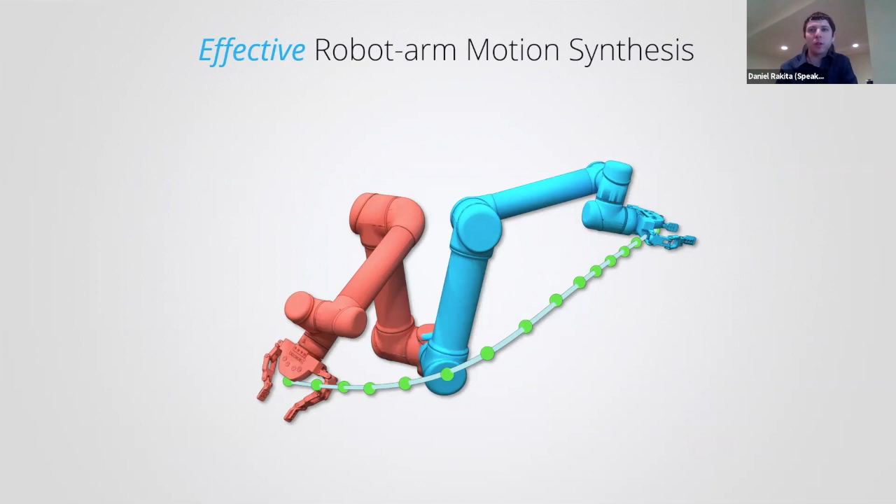The majority of my PhD work has been dedicated to coming up with algorithms that allow robot manipulators to effectively move in the world around us. And I think this begs the question of what does effective motion really mean in a robotics context? It could mean a lot of different things in a lot of different domains and applications. But throughout this talk, I'll argue that there are three important factors when considering robot motion generation.

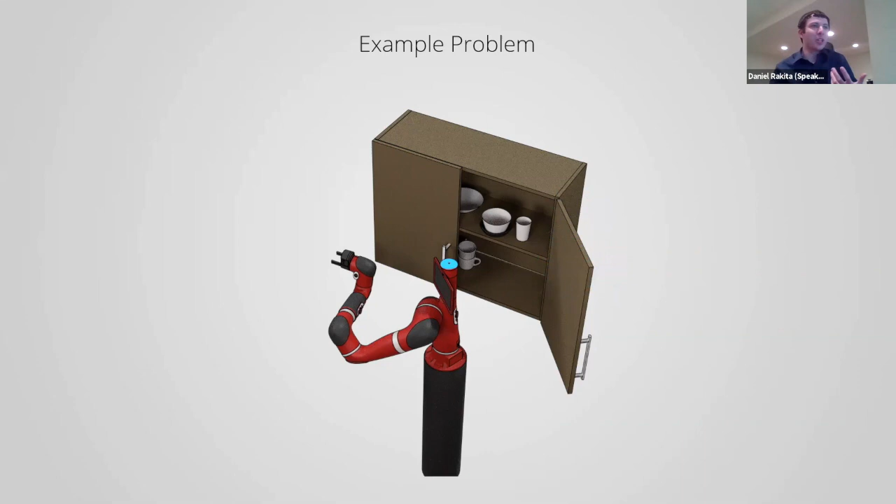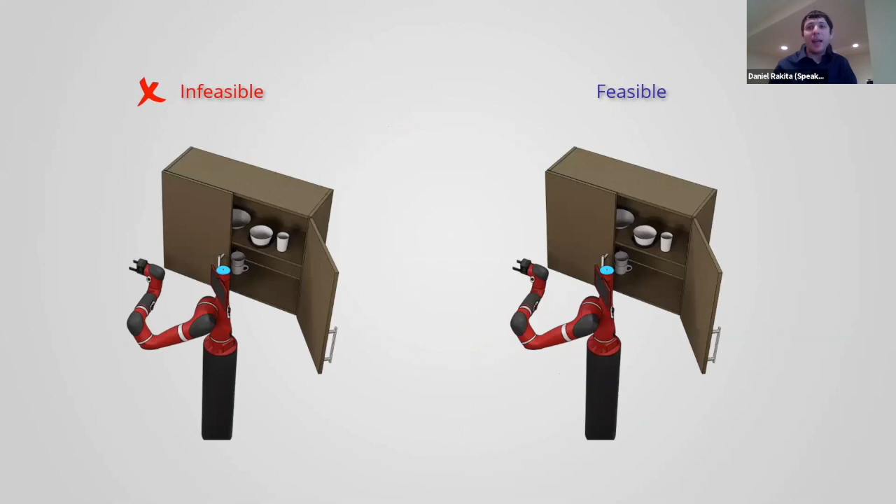To give a sense of these three factors in action, I'll use the following example. Say the Sawyer robot here has to get the cup from the top shelf to the bottom shelf. I think we all have a sense that any definition of effective motion should include the notion of feasibility, meaning the robot motion should be smooth, continuous, and avoid colliding with the environment. Just to give a side-by-side comparison here, it's clear that the feasible motion on the right is more effective than the infeasible motion on the left.

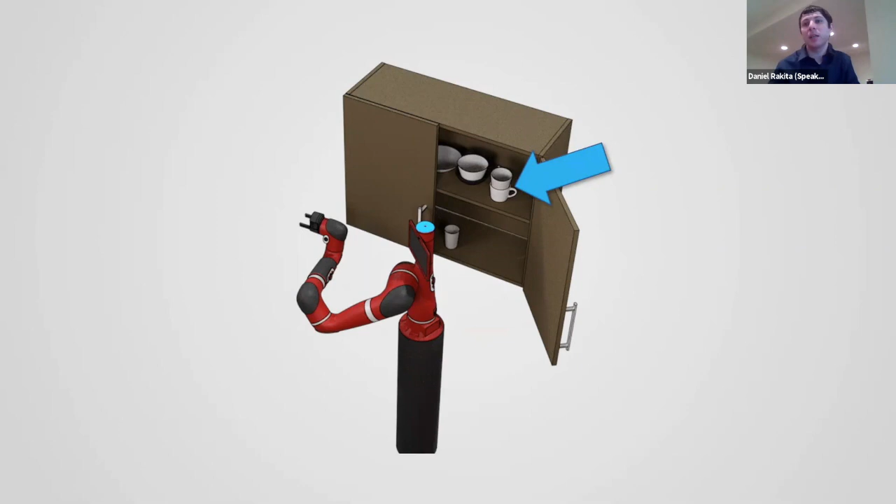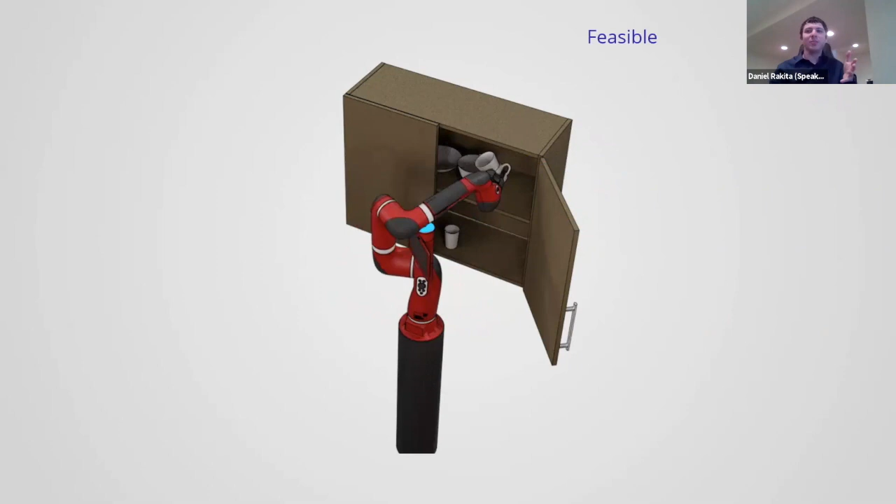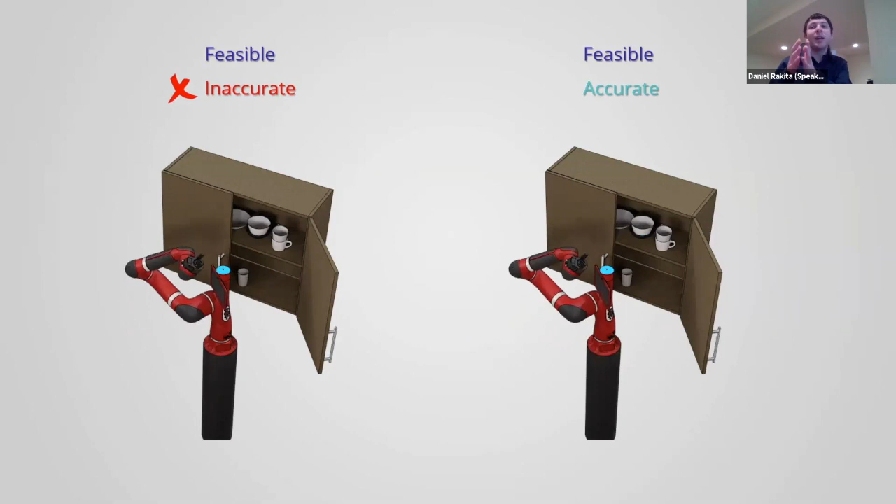But what if instead of moving a single cup, the robot now has to move this stack of 2 cups from the top shelf to the bottom shelf? If we use the same feasible motion as before, this is no longer effective motion in this case, since the top cup will fall to the floor. So in this example, while the motion is feasible, it's still not effective, since in some sense the motion lacks accuracy. So to create an effective motion in this case, we need something to generate motion like the one on the right here, that is both feasible and accurate, in the sense that the robot maintains an upright end effector throughout the motion.

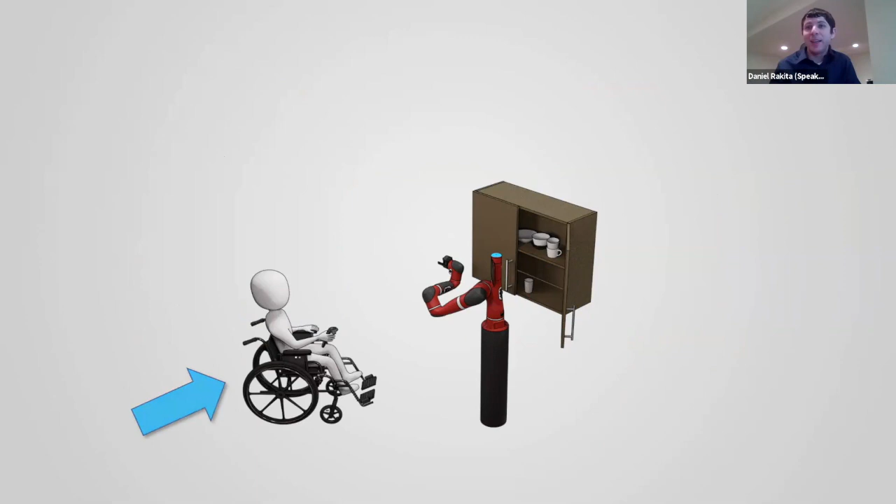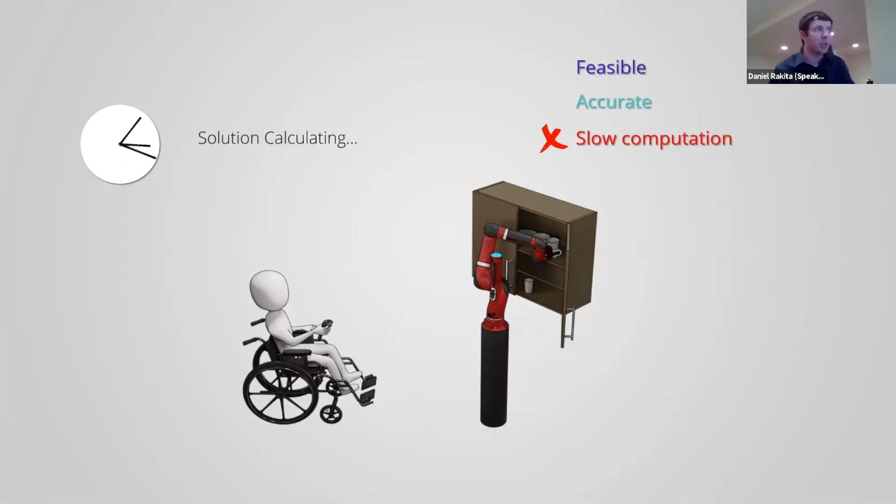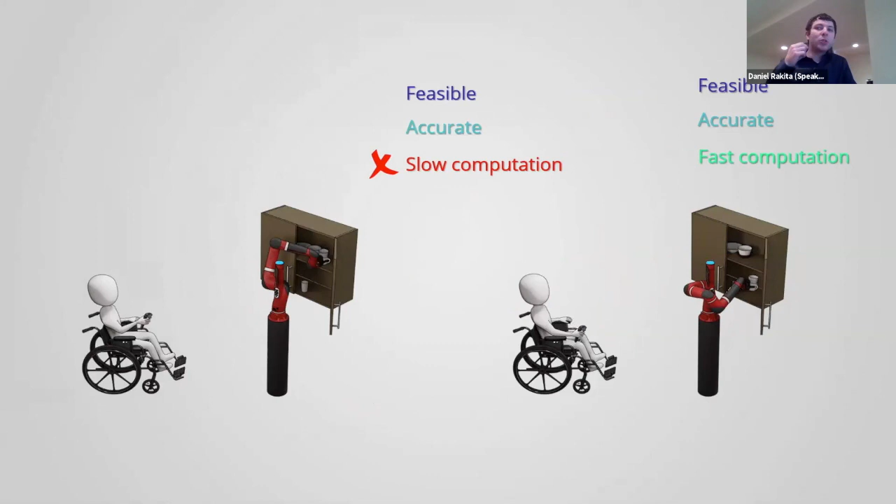Taking this example one step further, let's say we now want to allow the individual on the left to control the robot platform using our motion control algorithms to move the stack of cups, maybe using some sort of shared control interface. In this case, just having feasible and accurate motion won't be effective if it means that it takes many seconds or even minutes to compute these motions. Thus, the motion on the right here is more effective because it is feasible, accurate, and was also computed fast enough to keep up with real-time interactive demands of the task. To be clear, by fast versus slow computation, I'm not really referring to implementation quality, although that does play some role in some cases. I'm referring more to the fact that some problems themselves in robot motion generation may be inherently complex, say NP-hard or exponential in nature. So we have to get a bit creative to come up with solutions quickly.

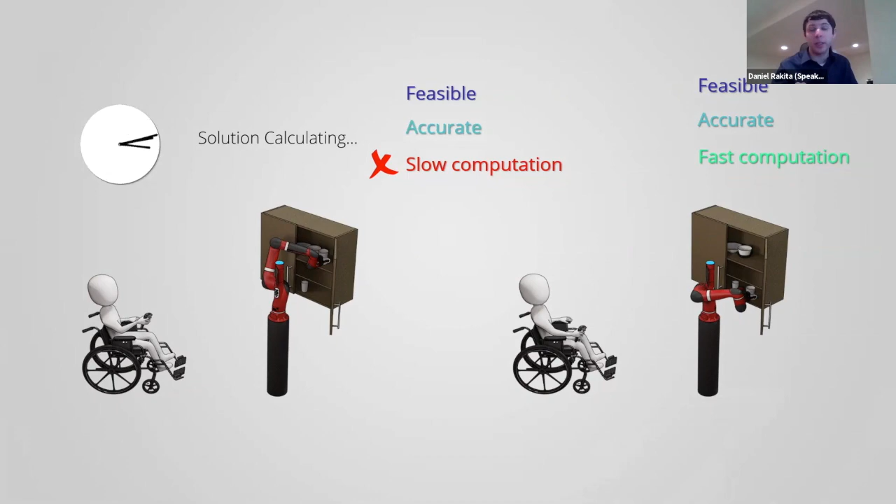So to quickly recap, the three factors of effective motion I've brought up so far are feasibility, accuracy, and computation speed. I think of these three things as vertices for my particular research space, and different algorithms have different trade-offs in this space. I'll keep coming back to this illustration throughout the talk to point out where I think current algorithms lie in this space.

The goal that everybody is aiming for is a general algorithm that would hit all of this triangle. I don't think it's too controversial to say that no one has really achieved an algorithm that does all three of these things. But a lot of my work has been spent chasing this overall goal, and I'll point out throughout the talk where I think we are in terms of achieving it.

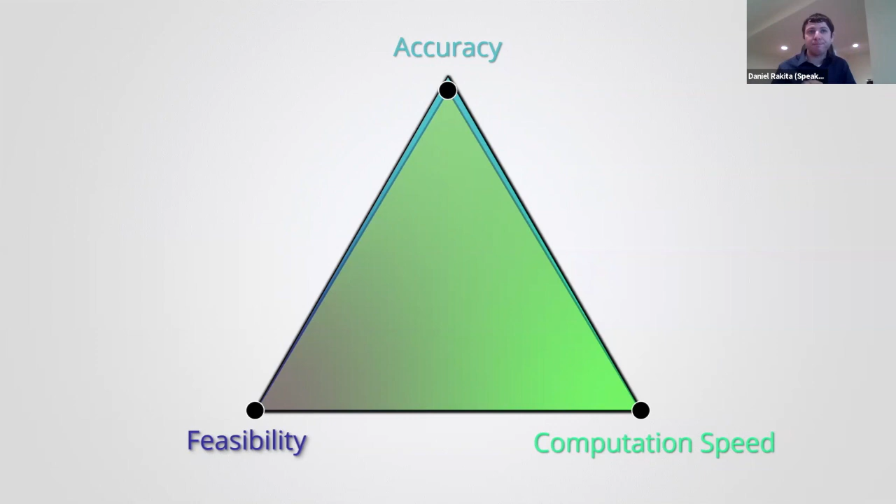So jumping into the technical methods. The primary motion framework that I'll be discussing for achieving accurate and feasible robot arm motion in real time is called RelaxedIK, which we presented at RSS in 2018.

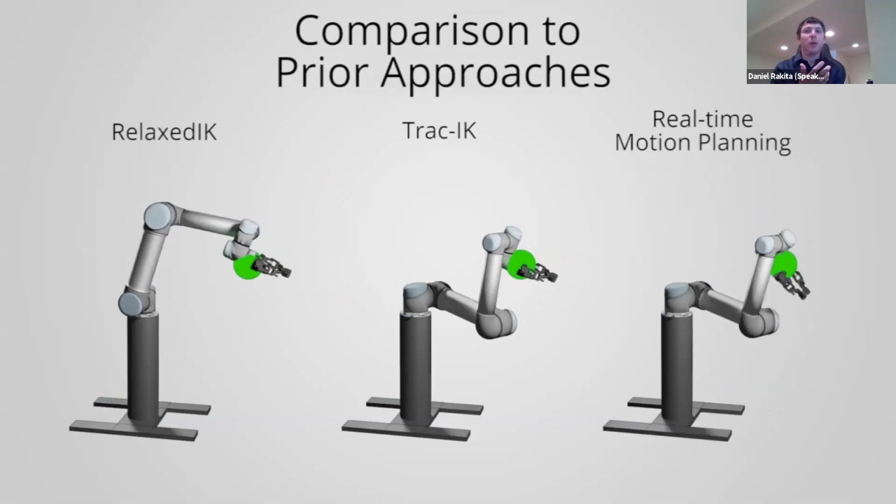Our method matches a series of end-effector pose goals in Cartesian space as best as possible without sacrificing motion feasibility.

In contrast, a direct IK solver like Trac-IK seen here exhibits infeasible motion qualities such as self-collisions, kinematic singularities, and joint space discontinuities.

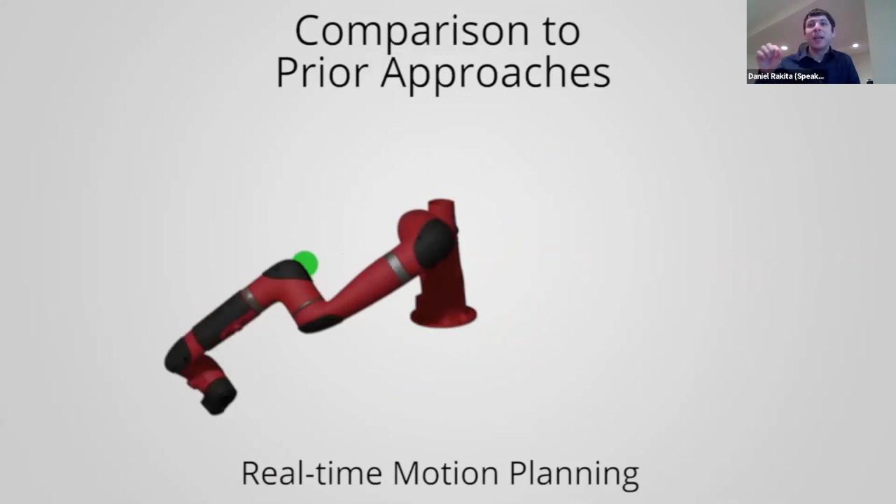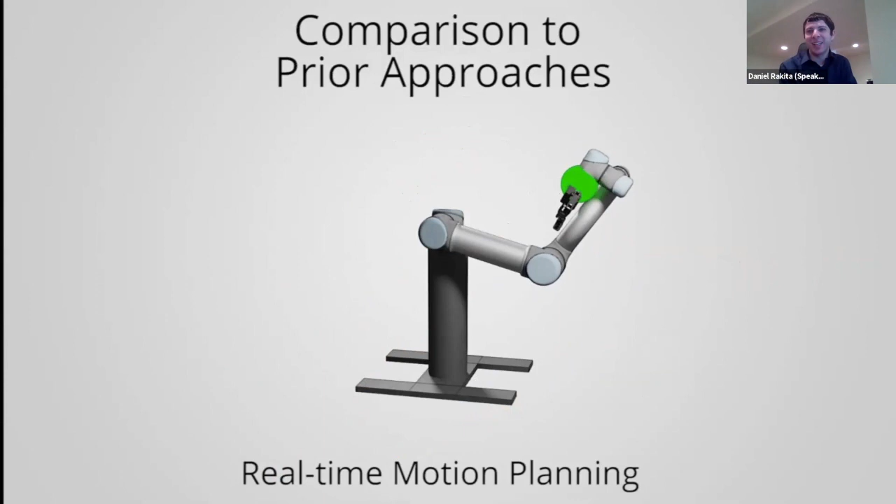On the other hand, something like real-time motion planning approaches do provide motion feasibility guarantees. However, they often require long sweeping motions that sacrifice end-effector pose accuracy in order to achieve these guarantees. For example, this motion shows the robot moving along this long arcing motion just to go a short distance in end-effector space to avoid a self-collision.

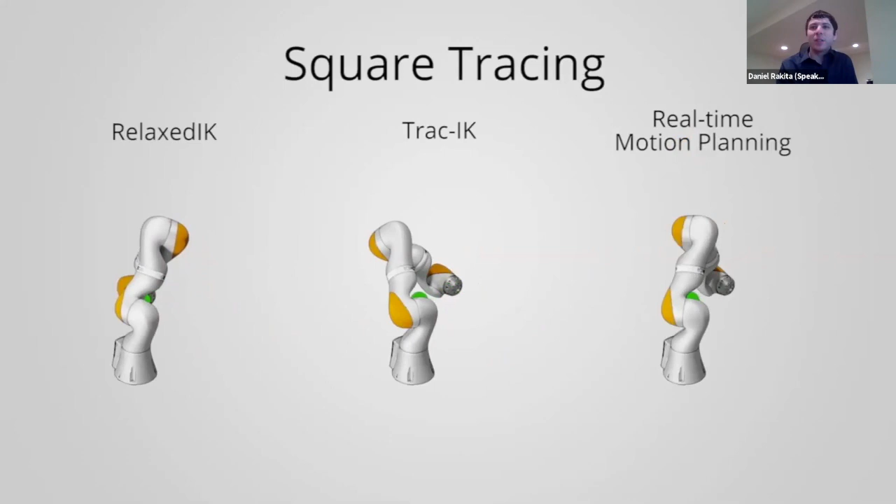So our method not only exhibits feasible motions that avoid self-collisions, kinematic singularities, and joint space discontinuities, but it also exhibits accurate motion that consistently matches end-effector pose goals over time.

Coming back to our triangle view of this research space, while Trac-IK has motion accuracy and computation speed, it lacks motion feasibility. Real-time motion planning has feasibility guarantees, but lacks motion accuracy and is relatively slow to compute solutions on the fly. RelaxedIK tries to gain a better mix of these three factors by relaxing a bit of motion accuracy to gain a lot in motion feasibility.

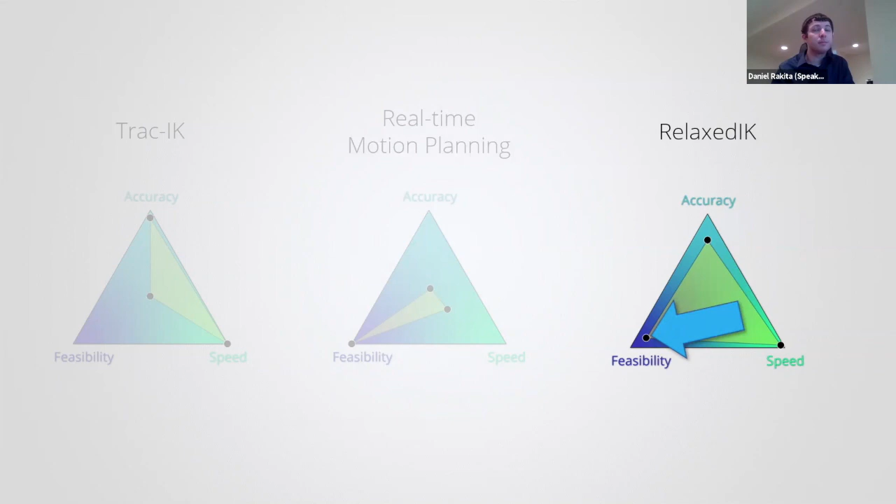So how do we achieve this under the hood? We achieve many objectives on the fly by casting the standard IK formulation as a weighted sum nonlinear optimization problem, where motion objectives such as end-effector pose matching, smooth motion, self-collision avoidance, and so on are encoded as individual terms in the sum.

We present a normalization procedure such that our method is able to effectively make trade-offs between many potentially competing objectives. The weighted sum objective function and a set of constraints are provided to a nonlinear optimization solver at each update, where a new robot configuration is calculated.

For details on all the objectives and constraints that we include in the solver, please see the paper. But in this particular talk, I'm just going to highlight how we formulate the self-collision avoidance term.

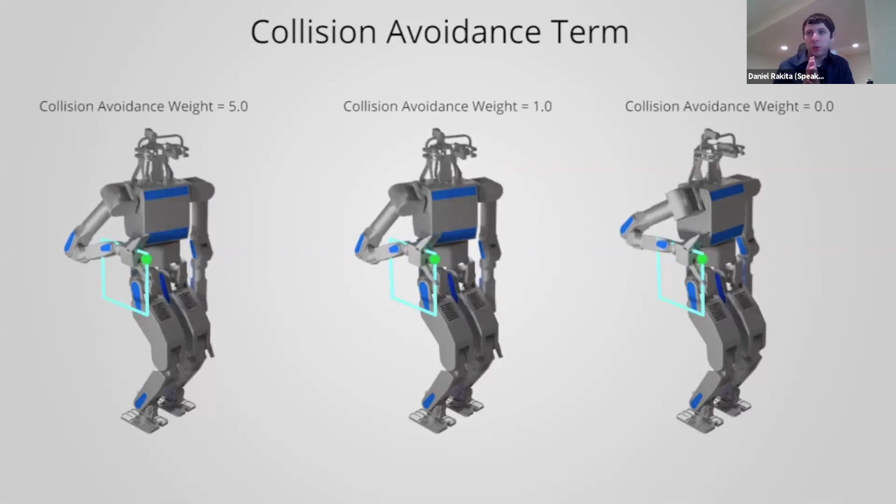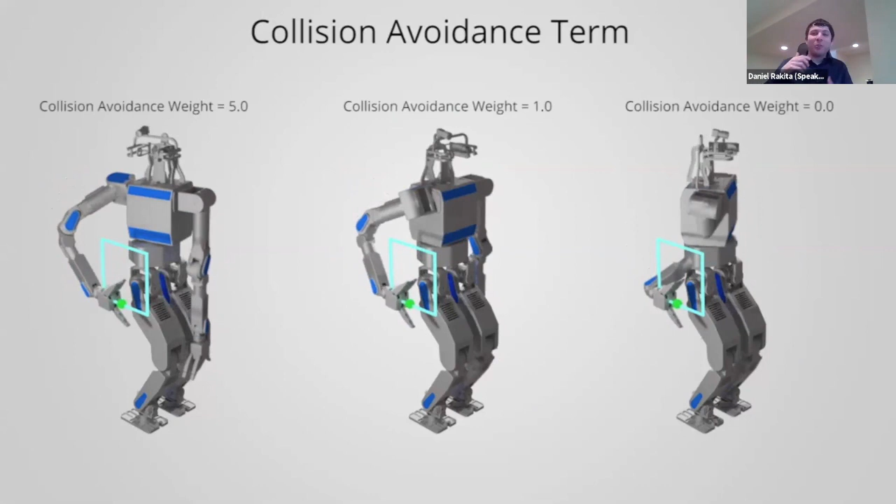Our collision avoidance term is trying to achieve two high-level goals. First, estimate a distance to a collision state in order to maximize this distance at each optimization. Second, we want to calculate this distance as fast as possible such that this procedure is amenable for a real-time optimization control loop.

To achieve these goals, we first approximate the robot's geometry with shape primitives and line segments and perform distance checking between all pairs of links. This procedure does work and it is robust, but it is too slow for real-time use.

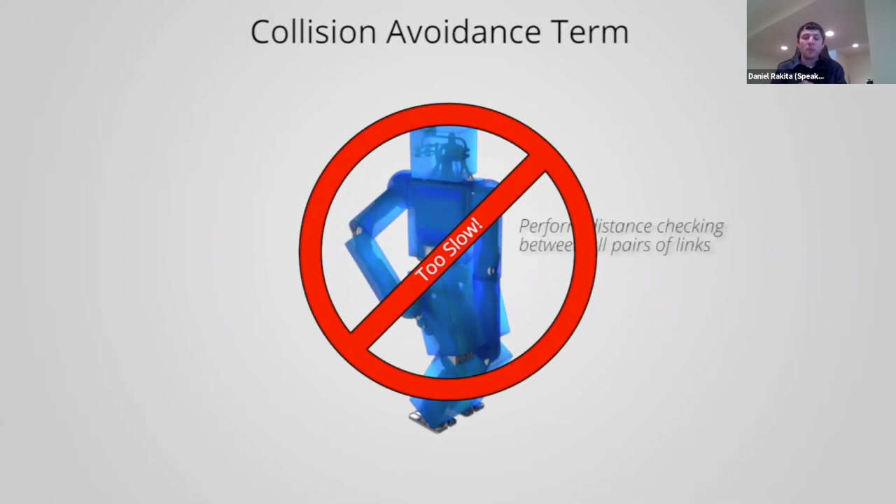Our central idea here is that we can sample hundreds of thousands of instances of this original collision potential function and train a neural network to approximate that function instead. The output of this neural network function reliably resembles the output of the original function, but it's two orders of magnitude faster, just doing a feed-forward pass through the neural network, making it plenty fast enough to serve as a single term in our optimization framework.

So we evaluated RelaxedIK against alternative motion synthesis approaches on 7 robot platforms, ranging from 5 degrees of freedom to 8 degrees of freedom, on 5 separate tasks.

We tried a couple of instances of RelaxedIK in our evaluation, one designed to be more accurate and the other designed to exhibit more motion feasibility. We found that both of these versions of RelaxedIK outperform TrackIK and real-time motion planning in terms of accuracy, motion feasibility, and motion smoothness across all robots and tasks.

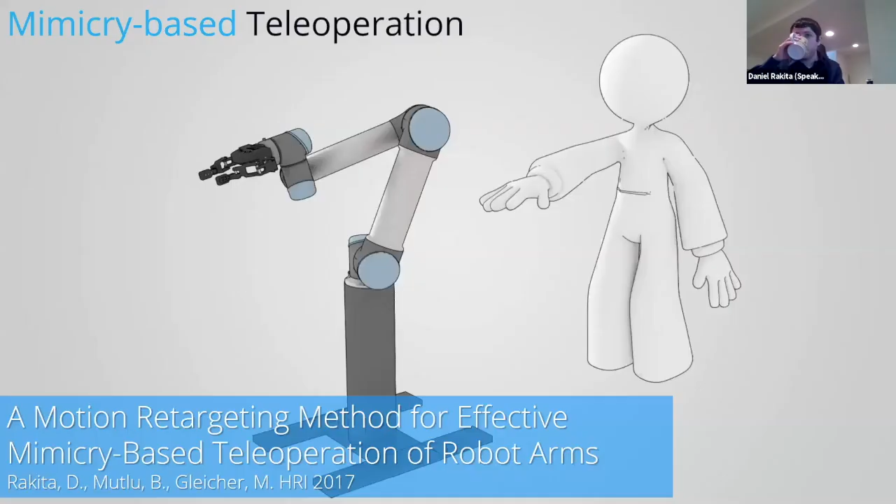So the first method I'll talk about is called mimicry control. This is work that we presented at HRI in 2017. And this is pretty much exactly what it sounds like. This is a teleoperation interface where the user demonstrates a motion in free space with their own arm and hand, and the robot attempts to mimic the motion as best as possible so that it can accomplish tasks in the same way.

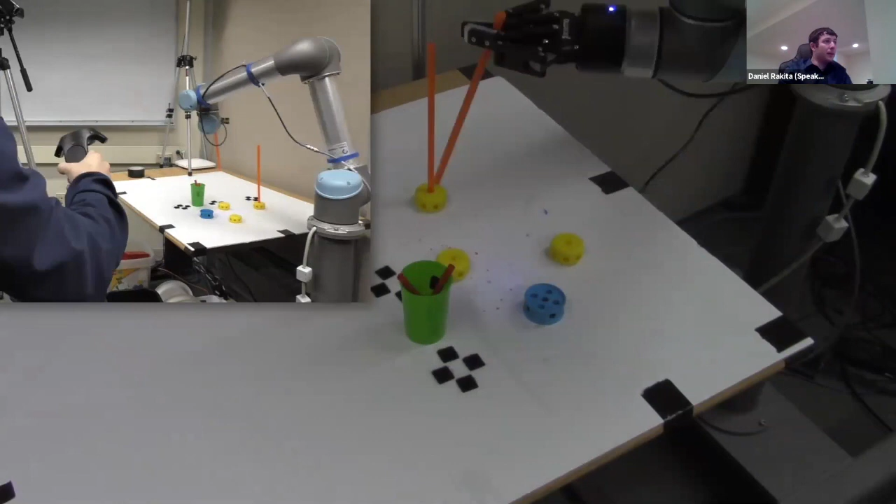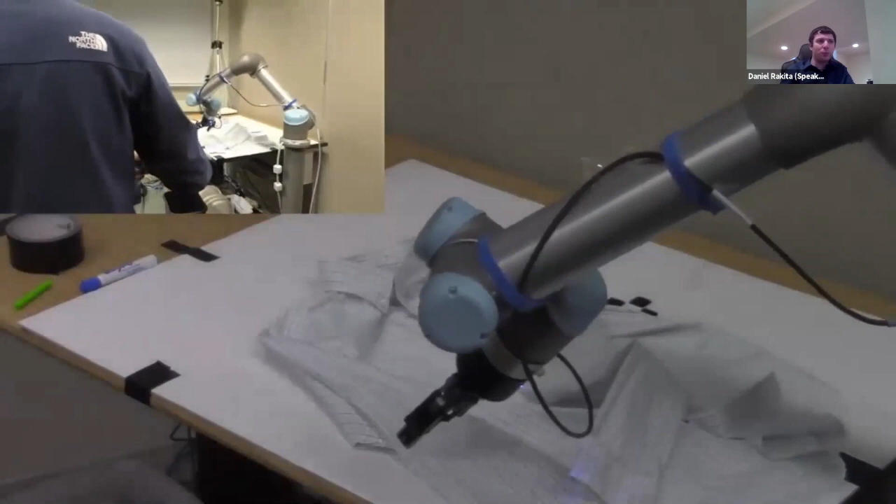And this is what the end result looks like here on a real robot. So the user just has a motion controller in their hand, and they're demonstrating how the robot should execute this Tinker Toys task with their own hand. And here's another example where the user is folding a shirt. So again, a pretty dexterous task that would be pretty difficult to do with another interface without directly demonstrating to the robot how to do it.

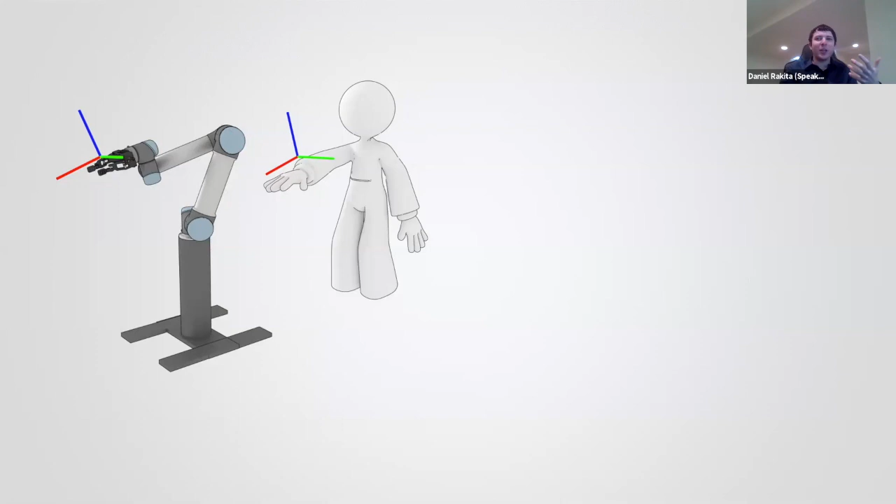So one thing that is probably pretty evident just by looking at this problem is that a robot arm and a human arm can be very different. They can have different geometry. The robot may move much slower or faster than a human arm. The robot may be larger or smaller than a human arm. And even the number of degrees of freedom could be different. For example, the UR5 here has 6 degrees of freedom where a human arm has 7.

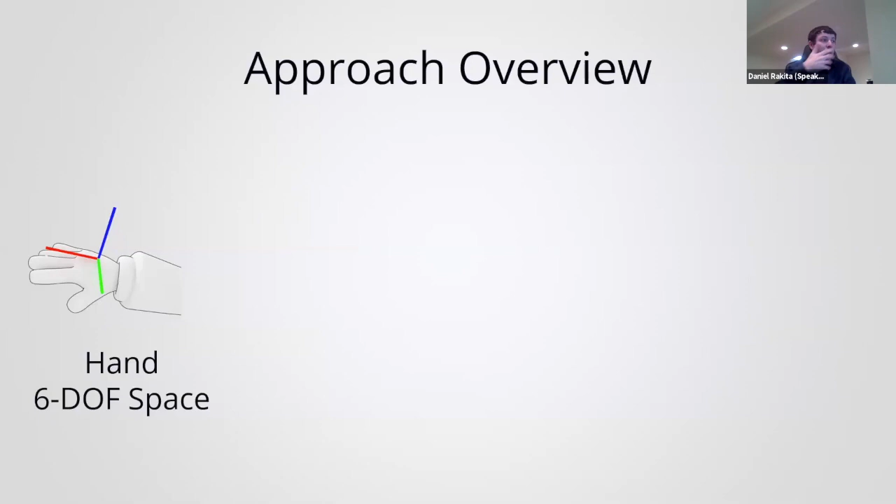So to overcome these differences, here's an overview of one way to solve this problem. We can capture a position and orientation of the user's hand, say with a motion controller. This gets mapped and scaled to the robot's end-effector space. And using inverse kinematics, we can solve for the robot's joint values corresponding to the end-effector pose goal. And this whole process can repeat at each update in the control loop.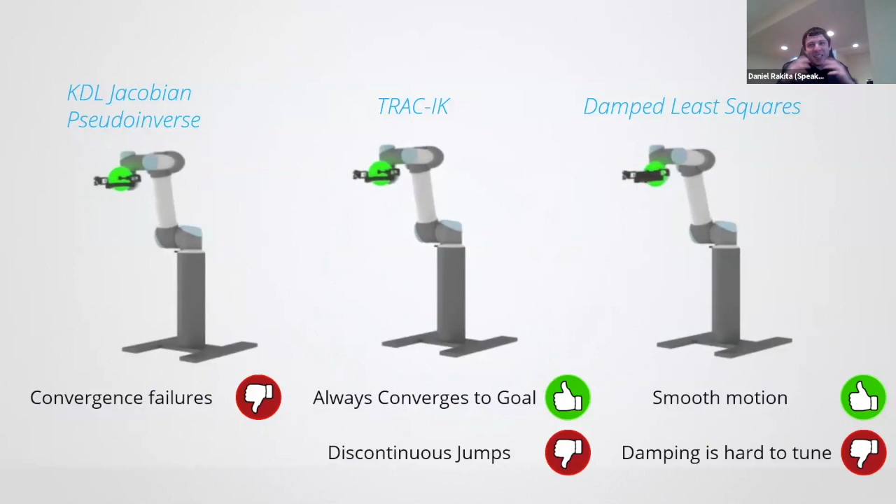So way back in 2016 and into 2017, we tried this method in some preliminary work and pilot studies, and we used some standard inverse kinematic solvers, and here's what we got. So many standard IK solvers across the board were not really up for this task, either due to convergence failures, discontinuous jumps, motion inaccuracy, kinematic singularities, and so on.

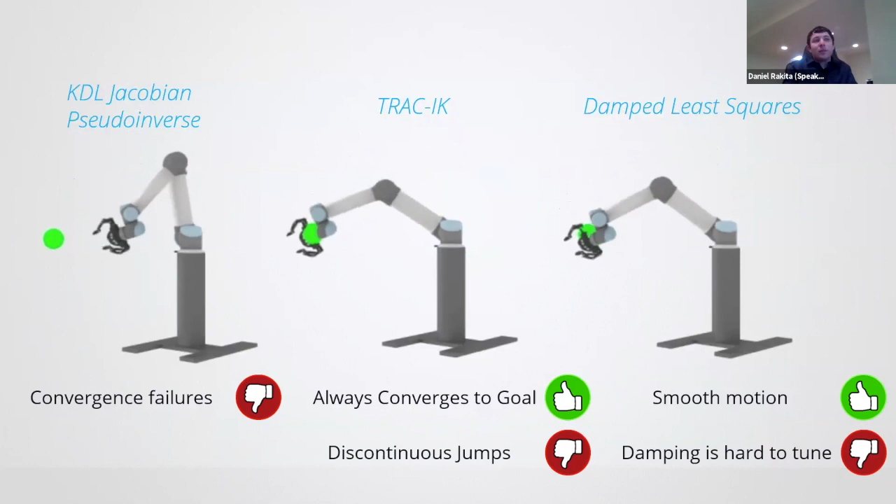So looking back at our overall approach, based on our preliminary results, it was clear that this last step here at the IK stage needed to be more robust. And we developed RelaxedIK in parallel with this work, and it ended up being just perfect for this motion retargeting problem, as the smooth, feasible, and accurate motions provided by the solver afforded a really nice and immersive experience for the operator.

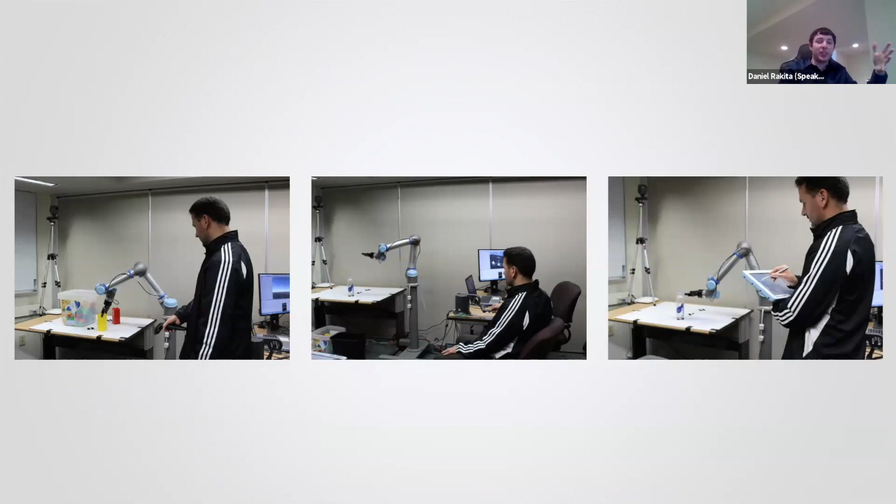And we ran a user study with 24 novice participants between the ages of 18 and 46. And we compared 3 control interfaces: our mimicry control, a 6 degree of freedom stylus device, and the native touchscreen interface of the UR5 robot. All participants tried out all control interfaces, so this was a fully within-subjects user study. And we tested all these interfaces on 3 home care tasks.

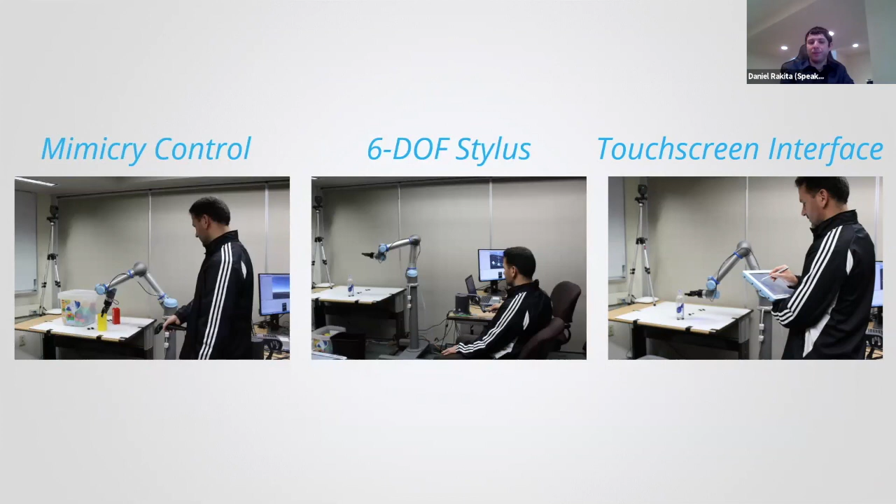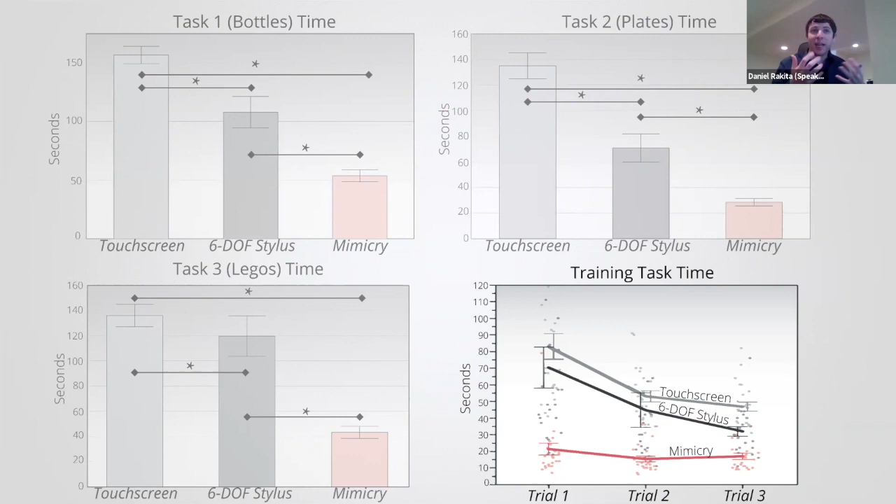And looking at training task time, our participants were able to complete the training task much faster using mimicry control than the other interfaces. In fact, if we look at even the 3rd training task trial using the 6 degree of freedom stylus device, this was still considerably slower than even the 1st trial for mimicry control. So I feel like this was really tapping into some intuitive sense of how to complete tasks and transferring that directly to the robot.

When reflecting on the feedback we got during our mimicry control evaluation, we noticed we consistently got one particular kind of comment. We often heard that the control method was easier to use and more natural than the alternatives, but it was still difficult to clearly see what the robot was doing.

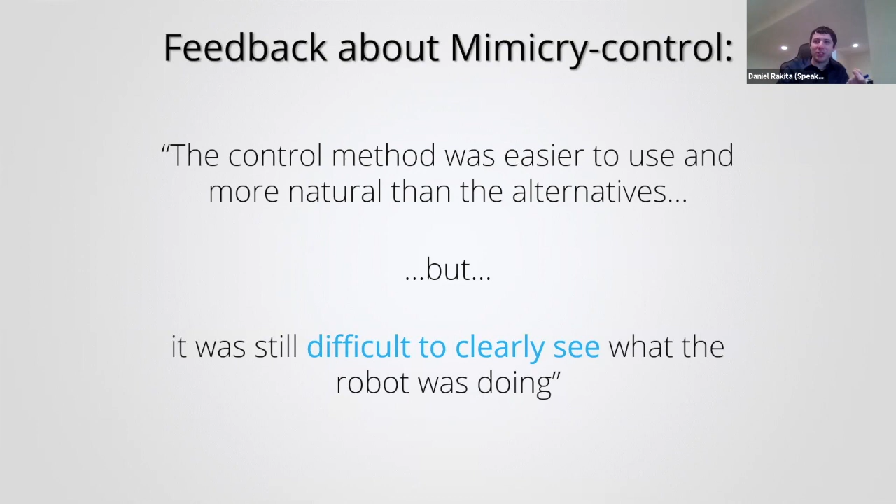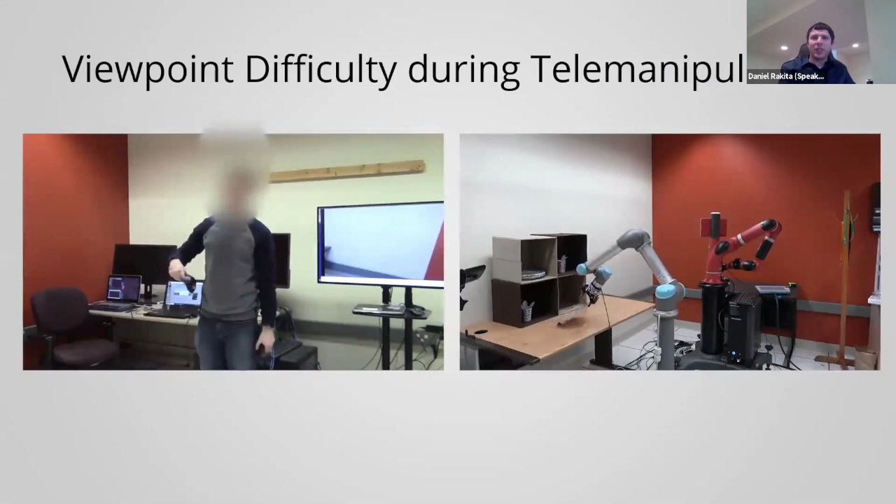When thinking about this problem, we thought, if this is such a big problem when the user is literally standing 6 to 10 feet behind the robot in the same room, this problem will just compound if someone was actually doing remote teleoperation from the other side of the world. So we thought this visibility problem in telemanipulation was something we should really start thinking about.

So to solve this, we looked at a solution where there's an automatic dynamic camera that can move the viewpoint and come up with a sufficient viewpoint on the fly for an operator. This is work that we presented at HRI in 2018.

This is the endpoint we'll be working up to in this work. We have a user remotely controlling a robot arm. On the left, we see what the user is seeing on screen, and on the right, we can see what is actually going on in the remote environment.

We have a second camera-in-hand robot arm alongside the manipulation arm that is automatically and continuously servoing in real time to provide a sufficient viewpoint of the remote environment.

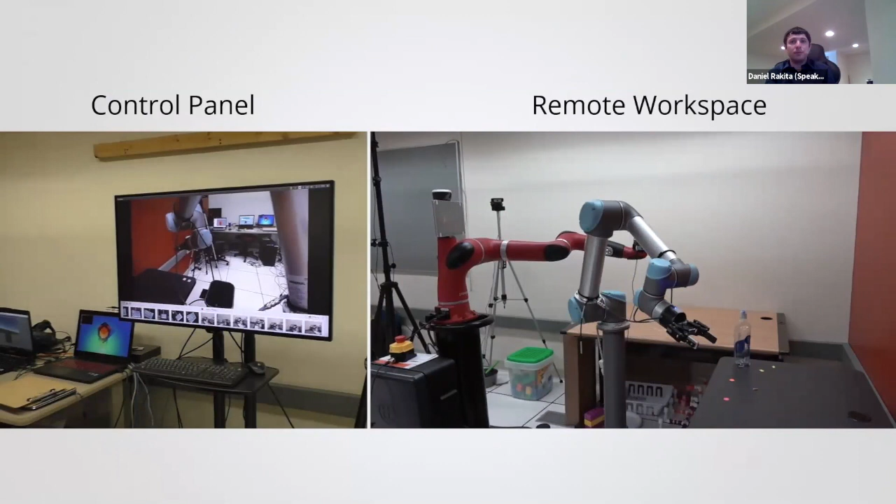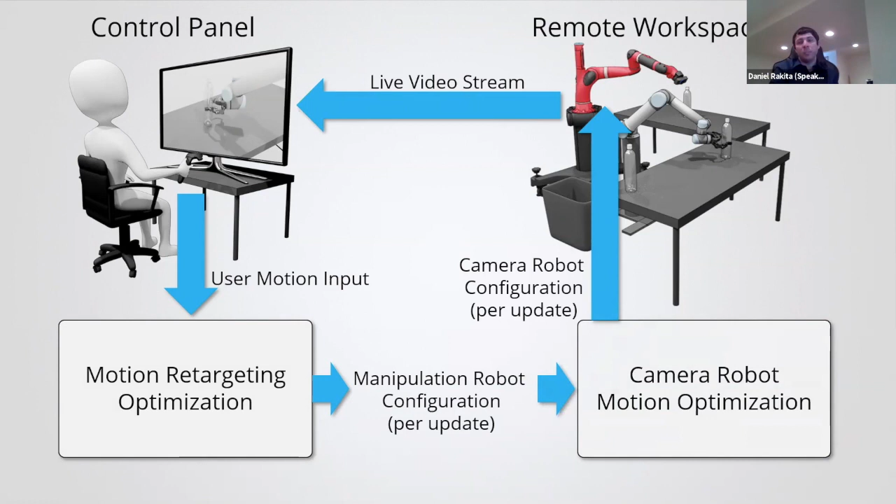So there are really two halves of this problem. The first being the control of the manipulation robot using a motion controller, and the second being the camera robot intelligently moving to provide a viewpoint that it estimates will best support effective manipulation for the user.

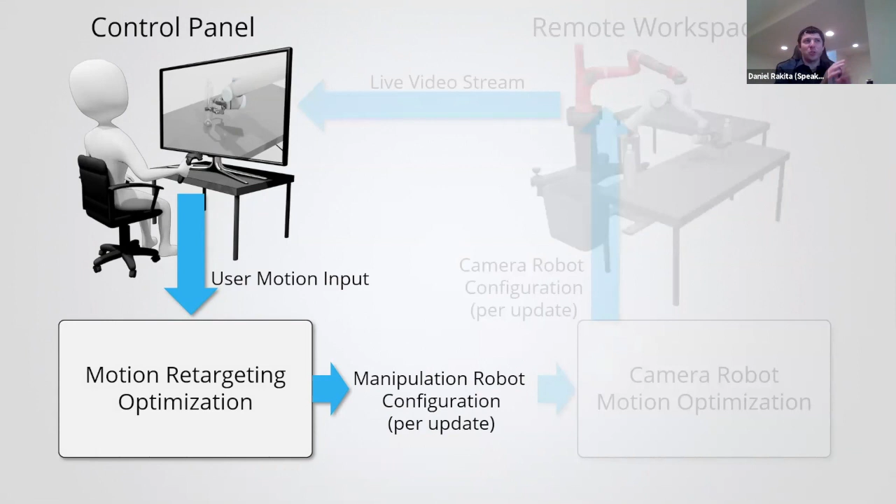So the first half of this problem, consisting of remapping the user's motion to a robot arm in real time, still uses the same mimicry control interface that I mentioned before. So for this part of the talk, I'm just going to highlight the second part of the problem, which is the moving of the camera to provide a sufficient viewpoint.

So the big problem we were looking at is, when faced with this kind of viewpoint that is clearly not sufficient to manipulate something in the environment, what should we do?

Our main premise is that the camera should move on the fly in order to dynamically adapt and optimize the viewpoint to select effective viewpoints for the remote operator.

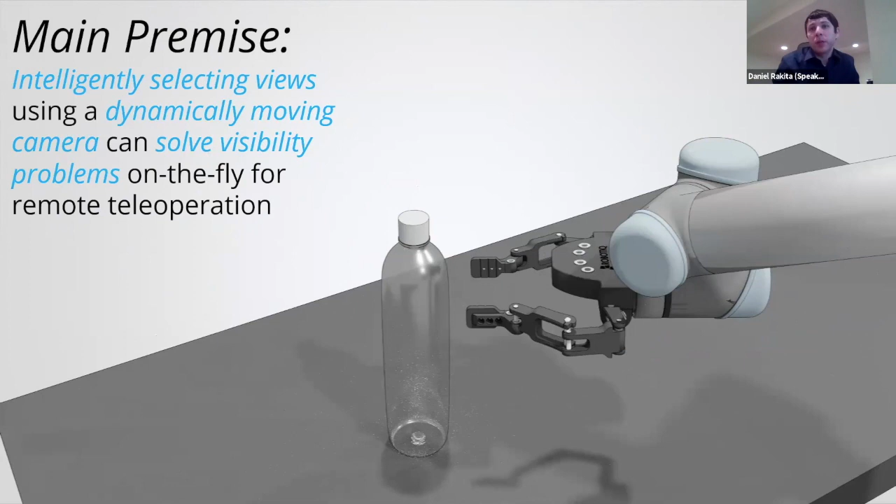Looking back at our solution, the automatic dynamic camera method provides solutions for a lot of the problems that may come up from alternative approaches, such as an end-effector camera or an array of static cameras, such as avoiding occlusions by manipulation or by the manipulation arm, avoiding occlusions by the grasped object, avoiding disorienting views.

We can tailor the control frame to how the user is seeing things on screen, and we can afford context and detailed views based on how close or far the camera is from the manipulation point.

So it's clear that the camera robot is going to have to consider many potentially competing objectives on the fly, such as the ones listed here.

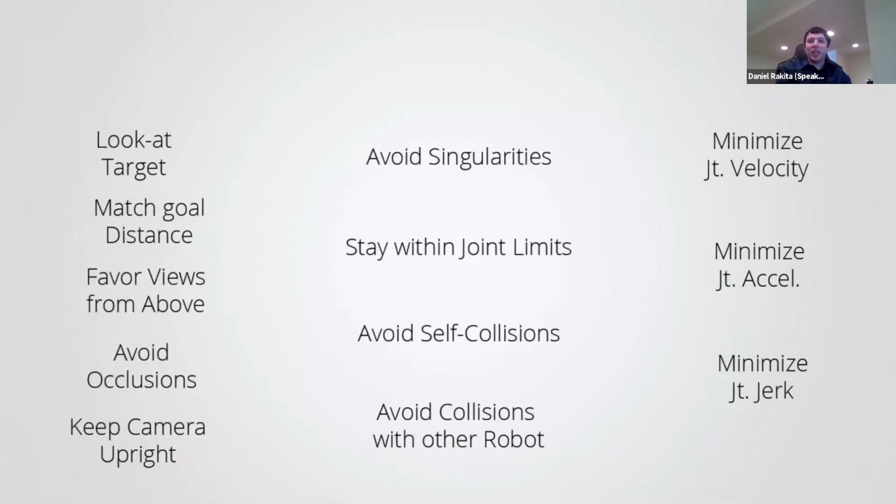To account for all of these objectives in real time, we organize these terms to form components of an optimization. And if we kind of squint as the components come into focus here, you notice we get the exact same RelaxedIK kind of formulation that I discussed before.

The really nice thing about the RelaxedIK framework is it's very flexible and it can accommodate a variety of nonlinear objective terms. So we can even include other things related to just camera motion and cinematography in the optimization, such as always looking at the target point, the look-at target.

Avoiding camera rolls, which will be really disorienting, avoiding occlusions caused by the manipulation robot, as well as favoring views from above for certain situations like a tabletop environment.

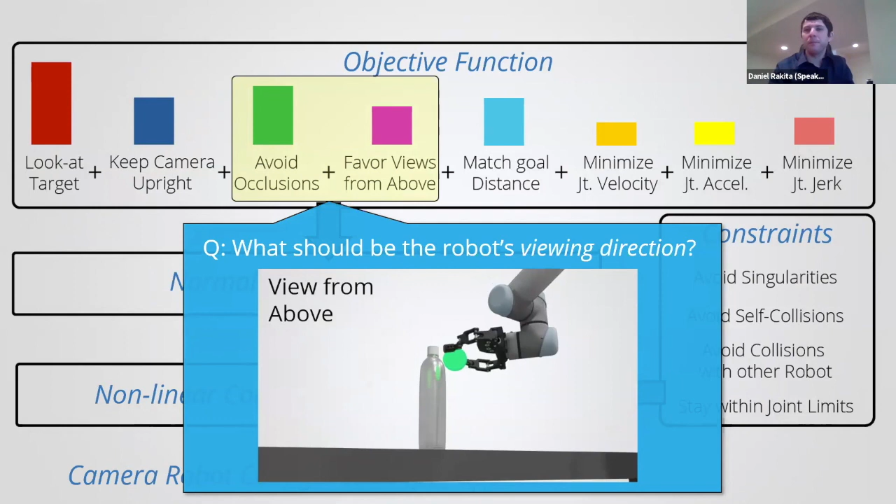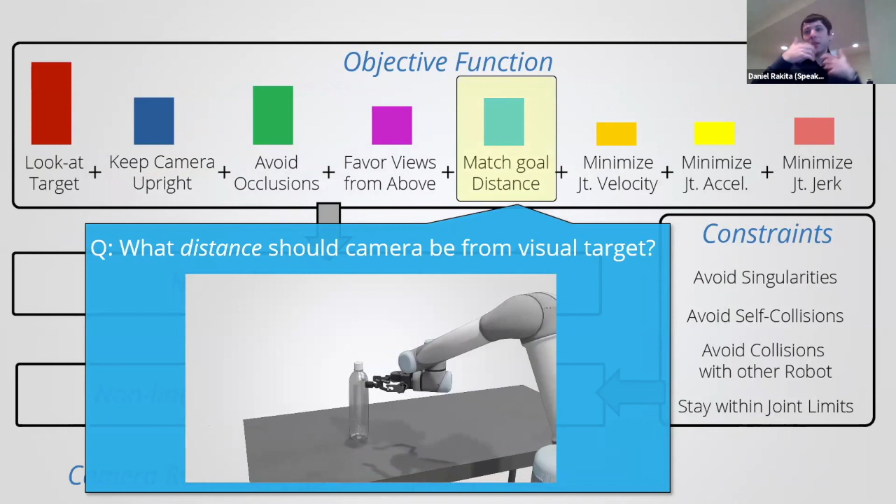And lastly, we can automatically decide on the distance that the camera will be from the manipulation point to afford either context or detailed view of the remote environment.

Briefly going over our evaluation of this approach, we again had a within participants study with 24 participants where we compared our automatic camera method to an array of static cameras and an end-effector camera. We hypothesized that our automatic dynamic camera would allow participants to complete more subtasks, and it would also be perceived as easier to use and more fluent.

Looking at our results, we see that our automatic dynamic camera method led to improved performance scores over the alternative approaches, and was also perceived as more fluent and easier to use over the alternative approaches as well.

We also extended this method in work we presented at RSS in 2019, where the camera robot was able to adapt its motion based on some understanding of the environment, as well as shared control feedback from the operator. In this example, the operator is able to see into the drawer in order to get something out with the improved viewpoint.

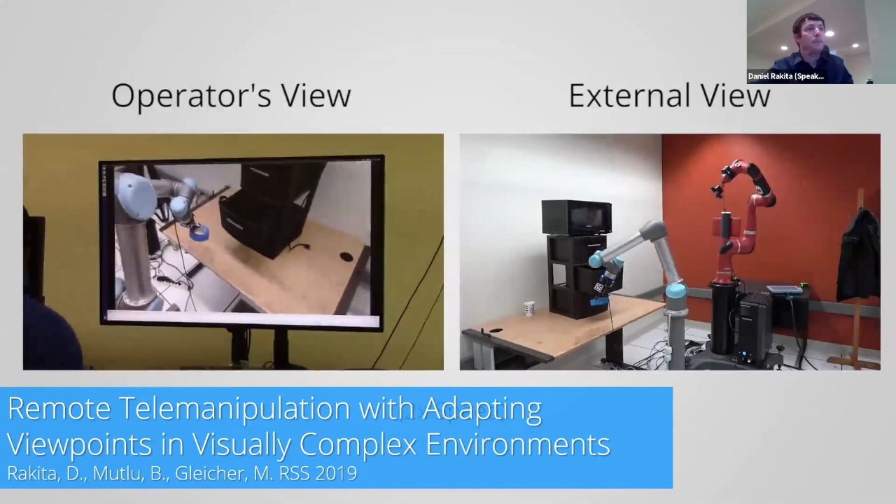The last RelaxedIK application I'll discuss in this talk is a bimanual shared control method that was published in Science Robotics in 2019. This is work done in collaboration with Laura Hiatt at the Naval Research Lab.

The goal of this work was to provide users with the ability to control a bimanual robot in a way analogous to how they would naturally manipulate objects in the world with two arms themselves. We wanted to make robot control in real-world, human-centered environments easier and more effective, even for novice users, for scenarios such as remote home care or telenursing.

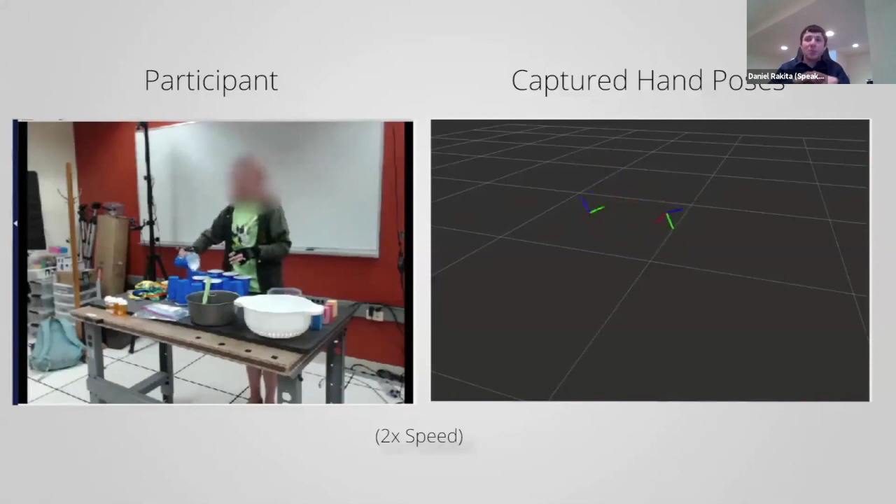Before focusing on the robot control aspects of this problem, we first investigated how people instinctively perform bimanual manipulations. So we collected a data set of 12 participants performing numerous bimanual manipulations, and our goal was to extract high-level patterns from this data set that we could use to inform our bimanual robot motion algorithms.

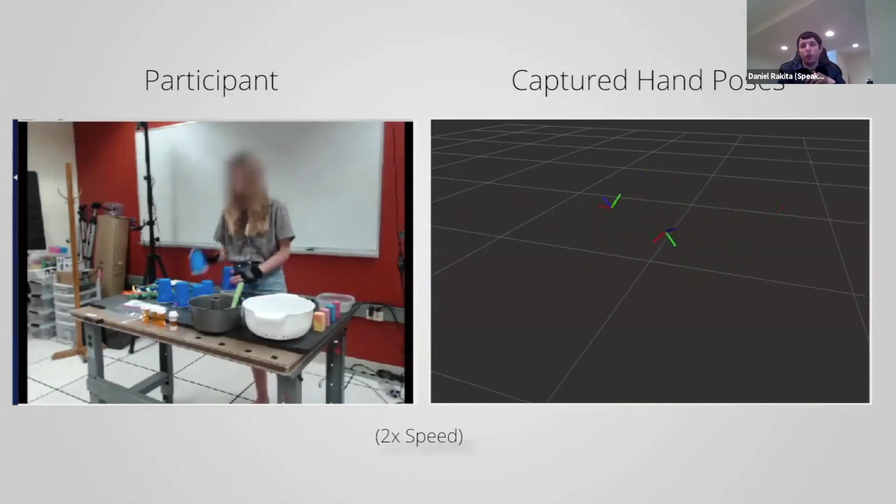Through our analysis, we observed that bimanual manipulations are generally built up from a small set of kinematic actions, which we organize into a bimanual action vocabulary. These actions are self-handover, one hand fixed, one hand seeking, and fixed offset.

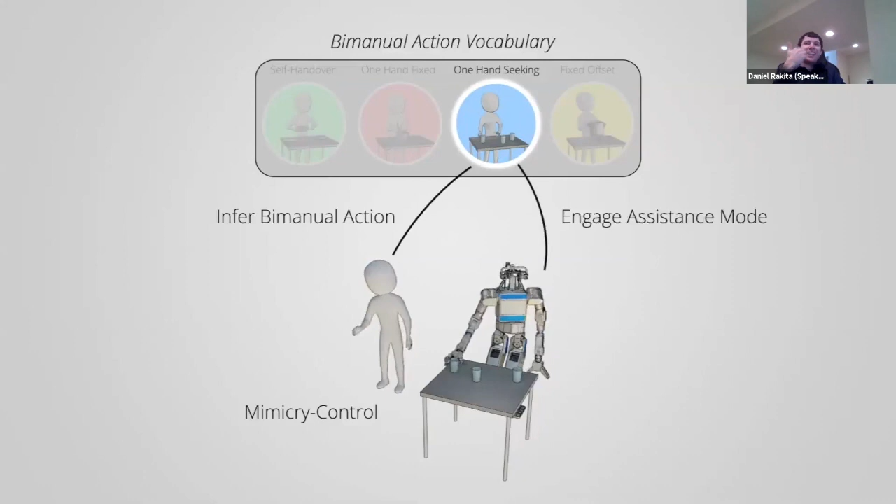With our bimanual action vocabulary at its core, our shared control method is structured as follows: the user controls a robot using a mimicry control interface, such that the robot reflects the motions of the user in real time. While the user is controlling the robot, the method uses a recurrent neural network to infer which action from the bimanual action vocabulary is being specified by the user, and the robot engages in the appropriate assistance mode to help during that bimanual action.

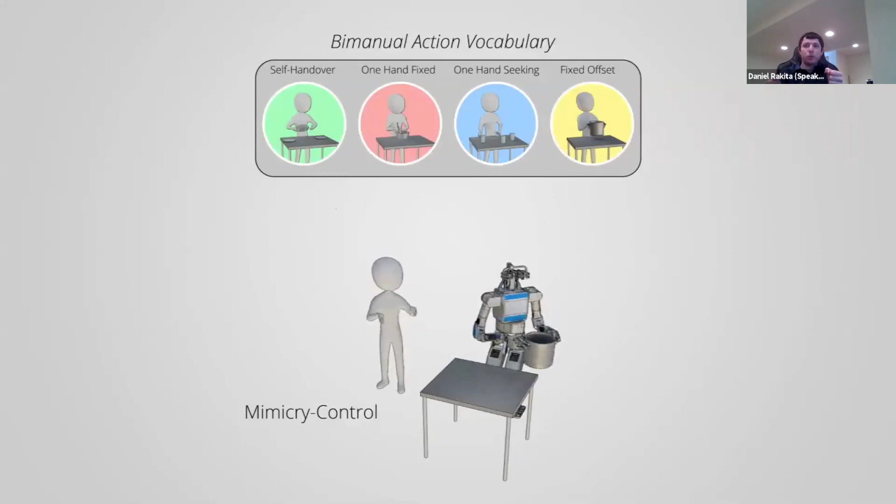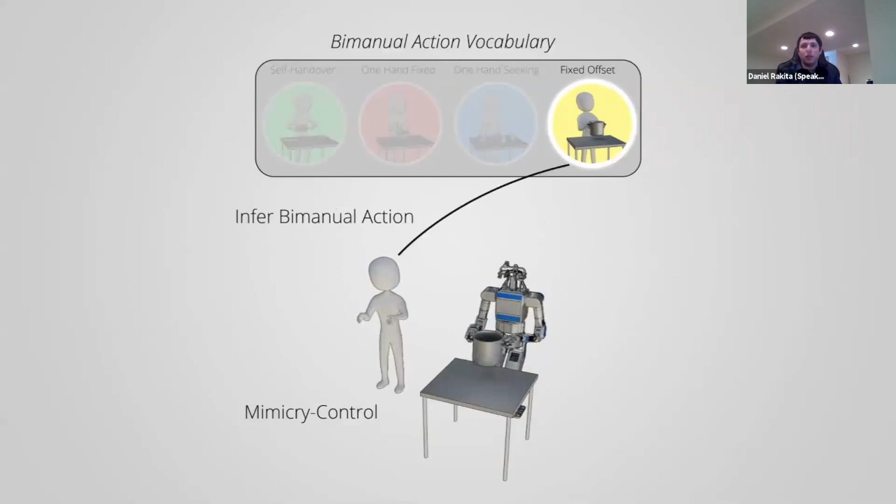In this example, the user naturally specifies that the robot should pick up the pot with both arms. The method recognizes that the user is specifying a fixed offset action, and constrains the robot's motions to ensure it maintains a fixed translation and rotation offset between its end effectors so it doesn't drop the object.

Looking at some examples from our user study: in this task, the participant is passing plates from the robot's right to left end effector to place the plates into the drying rack on the left. Without assistance, the participant has difficulty performing the task, as the distance between the robot's hands does not correspond to the distance between the user's hands.

But with our bimanual assistance modes included, the robot adjusts its end effector translation velocities to match hand velocities seen by people when doing self-handovers, and also ensures its end effectors are the correct distance apart from each other as specified by the user, to afford a natural handover or self-handover action.

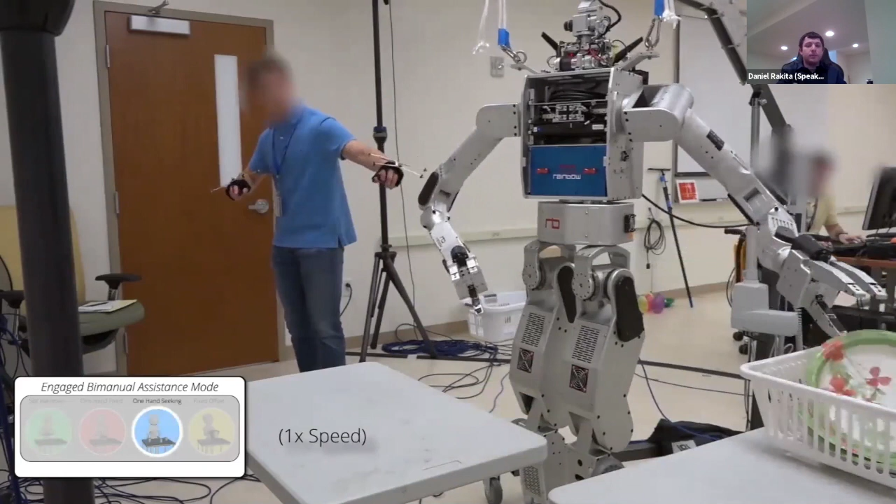In this task, the participant is moving the trash bin from one table to the other using both hands. Directly using two robot arms without our assistance modes available makes the task difficult to perform, as the arms do not realize they are coordinated together in order to move a rigid object. So small errors in motion inputs lead to large errors in motion outputs.

With our assistance modes available, the robot realizes that a fixed offset action is present and maintains a fixed translation and rotation offset between its end effectors throughout the action. Using this assistance, the participant successfully completes the task.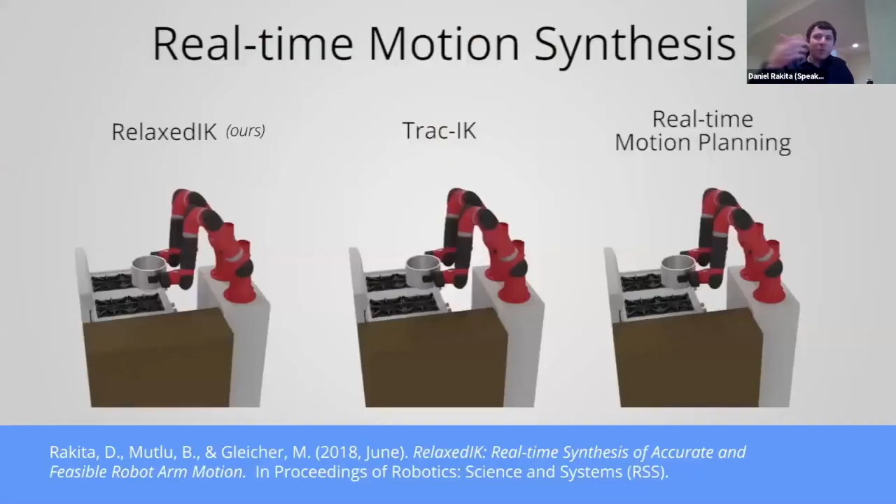A common theme throughout this talk: all of the underlying bimanual motions you're seeing here are calculated in real time using a version of RelaxedIK that incorporates our bimanual assistance modes on the fly.

All right, so to briefly talk about where we're going from here, I'd like to motivate our ongoing work by pointing out some of the limitations of RelaxedIK.

First, RelaxedIK is still relatively inaccurate at times. To be clear, in many cases where the robot is far away from self-collisions and joint position limits, the solver will very easily find very accurate motions with almost sub-micrometer errors in end effector space. But in challenging cases where the robot is close to collisions or singularities, the solver will end up with millimeters or even a centimeter or more of error in order to avoid these dangerous situations.

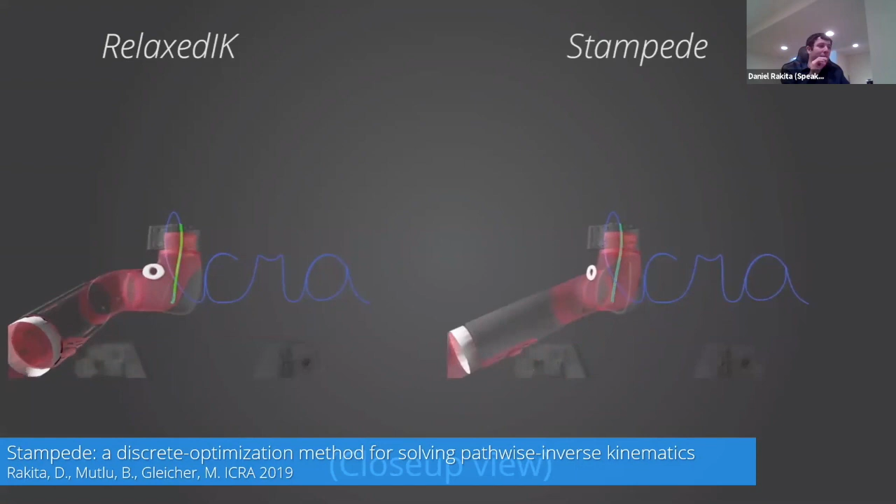I think the question going forward is, can we better avoid these challenging cases such that accuracy can consistently be high all the time? We partially addressed this issue in a paper we presented at ICRA 2019, with a method called Stampede. This method creates a smooth and feasible motion offline that's guaranteed to be highly accurate in end effector space.

However, in order to achieve this extra accuracy and feasibility, we had to frame this as a global pathwise optimization problem, meaning computation speed took a big hit in order to achieve that extra accuracy. So I think a question going forward is, can we have this extra accuracy and avoid these challenging situations while still having this be on the fly in real time?

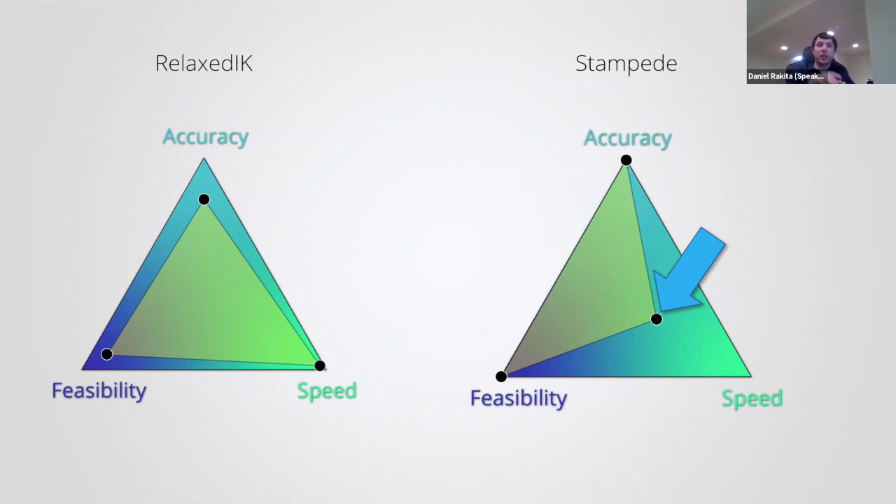The second limitation of RelaxedIK is that it cannot avoid collisions with complex environments. It may be able to avoid big static fixtures, such as a wall, that you could bake into the neural network if a robot is always in the same place. But in general, it's not going to be able to avoid complex collisions in cluttered or dynamic environments and things of that nature.

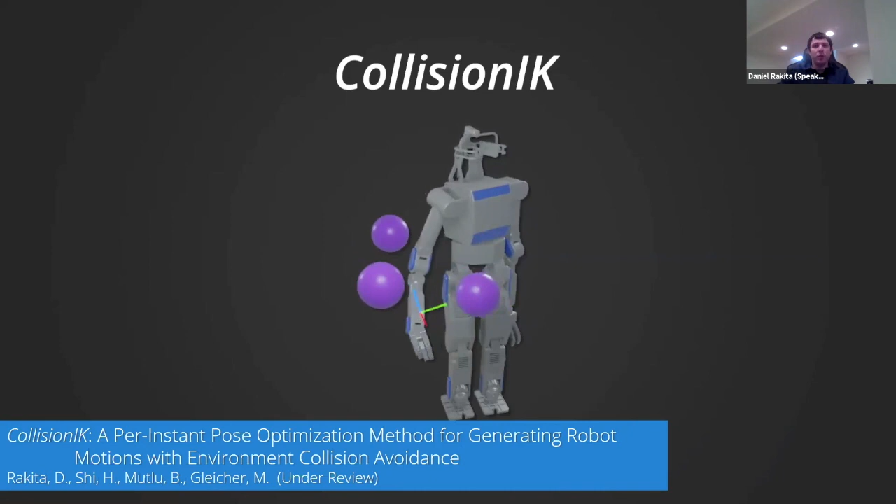So we have two ongoing solutions that have really looked at this limitation over the past year. First we have a method called CollisionIK that is currently under review. This adds a separate environment collision avoidance objective term within the RelaxedIK optimization structure, while still trying to maintain other objectives as best as possible, such as end-effector pose matching. All of these motions are still per update, so it still feels and operates like an IK solver in a per-instant way, but on the fly it's doing this collision avoidance with the environment.

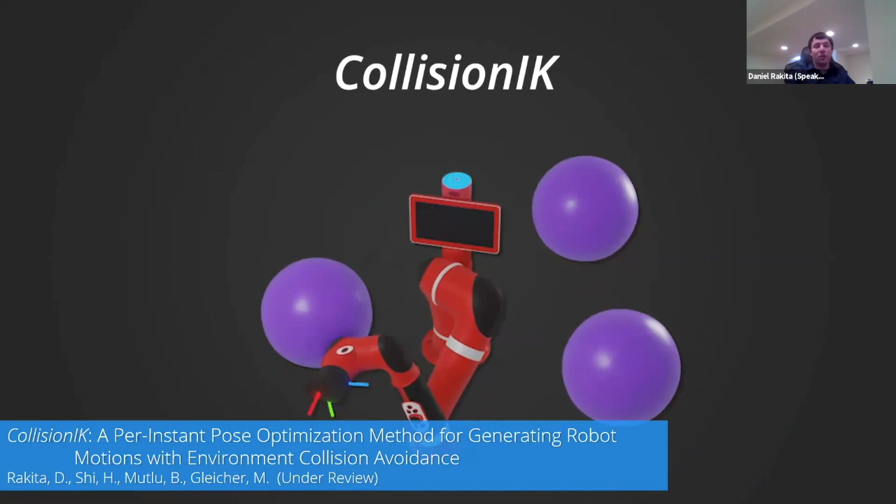Here's another example with CollisionIK compared to RelaxedIK and the MoveIt Cartesian Planner. We're able to also have different varieties of environment collision avoidance, say just doing position matching, or adapting the kind of objectives that you want based on how far the robot is from a collision.

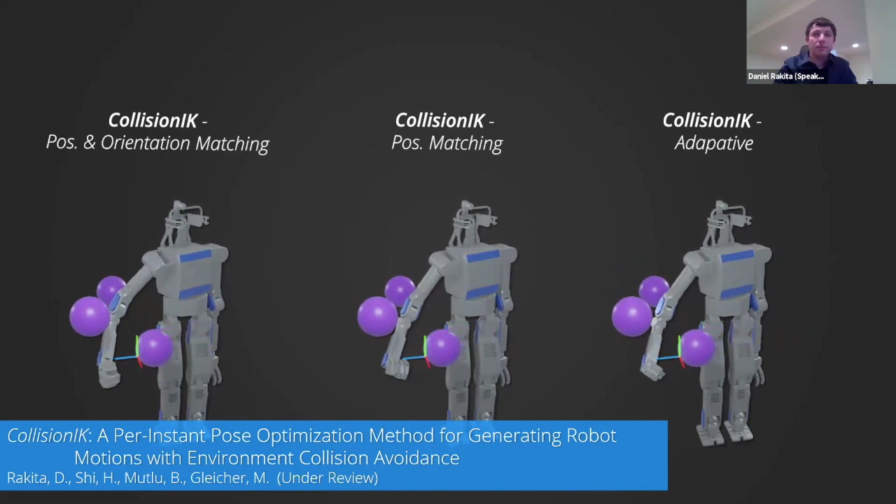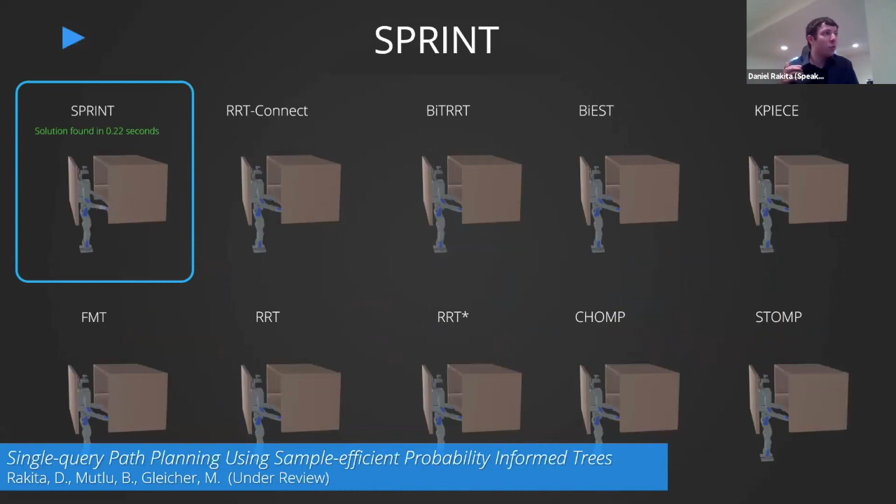One of the problems with CollisionIK is that it might still be susceptible to local minima. One way that we're getting around that is we've proposed a new sampling-based motion planner that finds solutions significantly faster than other sampling-based or optimization-based motion planning methods. We think this is actually fast enough where we can incorporate this into some of our real-time control loops and do many iterations of motion planning and replanning on the fly. This work is also under review at this time.

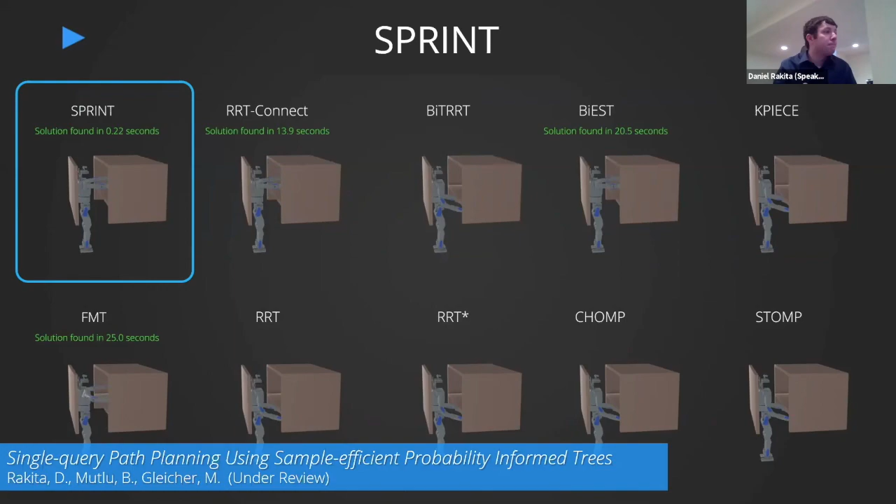So wrapping up with a quick discussion. Throughout this talk, I've presented on a number of previous and ongoing research threads for achieving feasible and accurate motion on the fly. Going forward, we have many ideas for how we can take these methods and maybe combine them into a method that truly captures a lot of this space.

We're really excited about where this can all lead to and the many applications that this might open up with these technical methods, such as more shared control stuff in, say, remote home care, telenursing, space robotics, remote surgery, or nuclear materials handling.

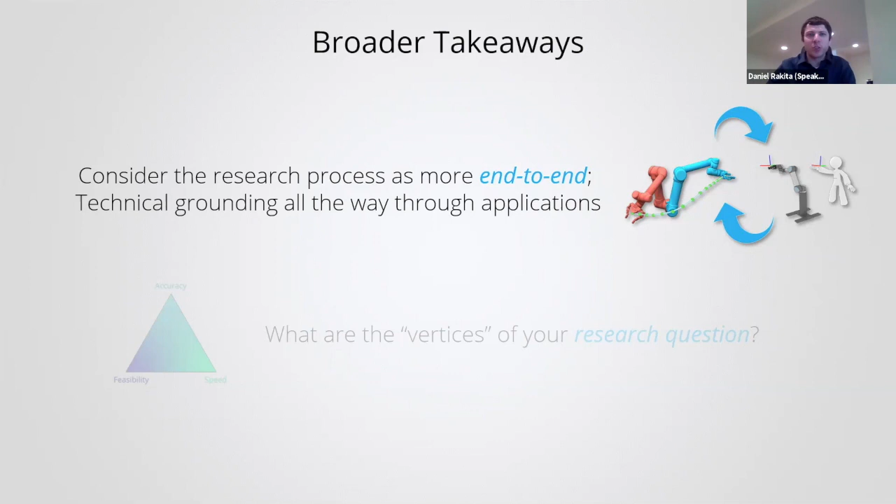And just a few overall takeaways from all this. First, perhaps consider approaching research problems in a more end-to-end way, all the way from technical solutions to end-user applications. I personally have found it very fulfilling to work on things at both a low level and then see how these low-level algorithms actually operate in the hands of novice users who have never even seen a robot before. I think this really gives a good perspective to see how the algorithms that we all work on could potentially impact real people going forward.

Secondly, I kept coming back to this triangle view of my research question. I think especially for maybe undergrads or newer graduate students who may happen to be watching, consider thinking about the kind of vertices of your research question, so to speak. I think it's a good way to grapple with and reason about the challenges and trade-offs in your space as you try to create impactful findings.

So with that, thank you so much, and I'll take any questions. And yeah, thanks.